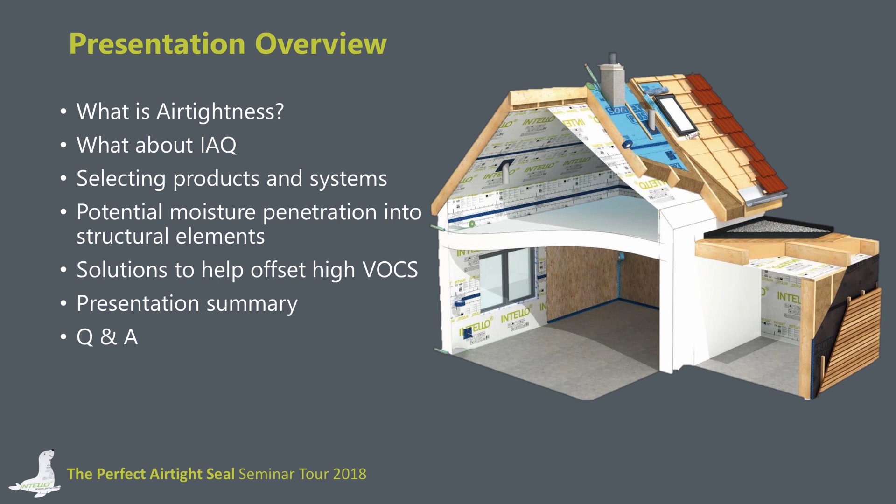My next presentation is stepping back and looking at airtightness more generically, speaking about indoor air quality in buildings and improving health in buildings. Because airtightness is a very emotive term, there's a lot of confusion about what it's really trying to achieve. I'll recap briefly on what airtightness is and its relationship with indoor air quality, looking at systems and materials used, potential sources of moisture in buildings and structural materials, and solutions to offset volatile organic compounds or toxins getting into the building, then give a brief synopsis and recap.

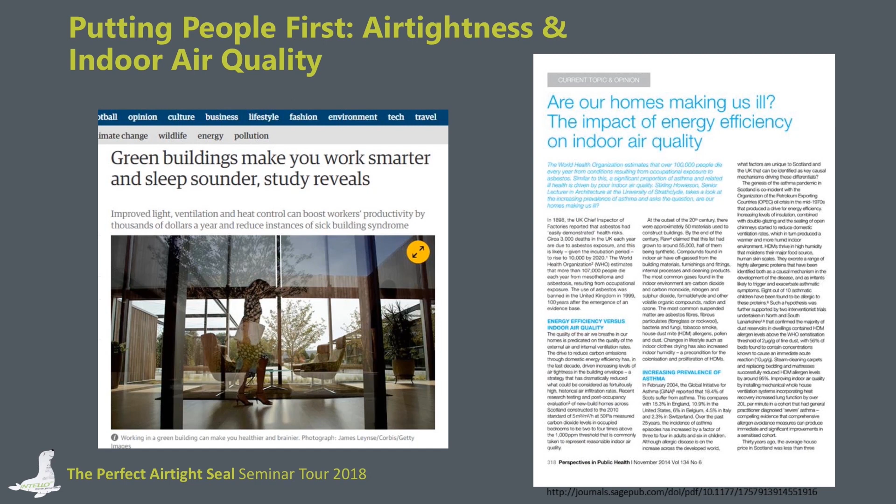There's a lot of confusion about healthy building or low energy buildings. This article from The Guardian says green buildings make you work smarter and sleep sounder, a study shows. But for every article like this, there's one like this: Are our homes making us ill? The impact of energy efficiency on indoor air quality. So there's a lot of conflict in terms of what we're trying to achieve. At the end of the day, buildings are for living in and for health and well-being - they're not energy incubators.

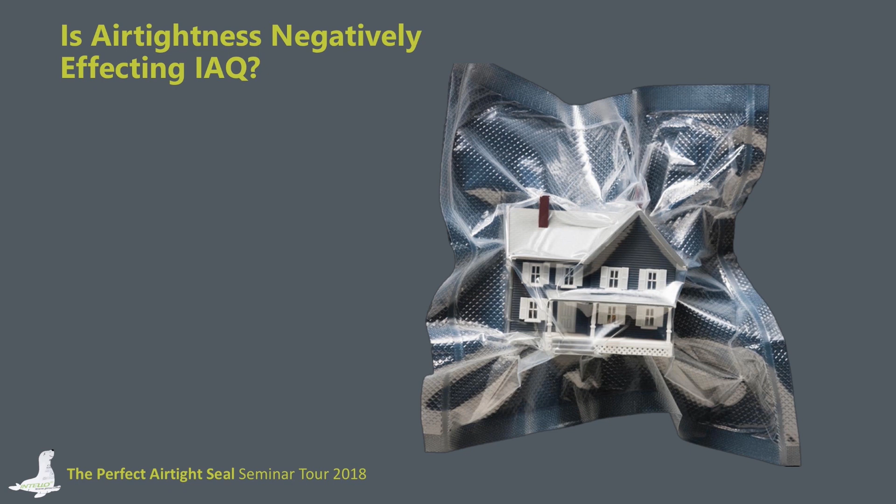There's a lot of confusion about energy efficiency and energy improvements in buildings, and that may be down to a lack of experience and also bad experiences to some degree. Airtightness as a term is very much about reducing gaps which shouldn't be there in the first place - it's not about hermetically sealing a building, locking the windows and making sure you can't get any air in. I recall one builder at our training centre with no experience with airtightness, and we were explaining to him what airtightness was.

He ran a blower door test in our training unit, and he was looking at us scratching his head, then he went over to the door and opened it and said, 'Now look, now your airtightness is gone. What's the point?' So airtightness is a confusing term.

I go back to my example earlier on. When I put over the curtains in my house, the curtains are still moving in front of the windows due to leaks. But when I live in an airtight house, when you pull over your curtains, they're not dancing in front of the windows because they're good windows, well installed with appropriate materials. And what about leaky buildings? Aren't they healthy? Aren't leaky buildings that allow the wind to blow through our plug sockets, our skirting boards and places like that very healthy living spaces?

Well, in fact, mould growth has been a long-term issue - it's not a recent phenomenon. In the UK and Ireland, and all over the world, we're regularly breathing VOCs from mould or some level of mould. Mould is omnipresent, but it's a question of concentration, the amount we have, and its intensity. Some people differ in their reaction to it as well.

We see this building here, for example. This is a building that's extremely leaky and had an energy retrofit, and a lot of work was done. It's a cavity wall where the cavity walls were pumped with insulation, and the insulation in the attic was upgraded. Following this, a neighbour of mine asked, 'Niall, could you have a look at my house? I'm having these mould issues.'

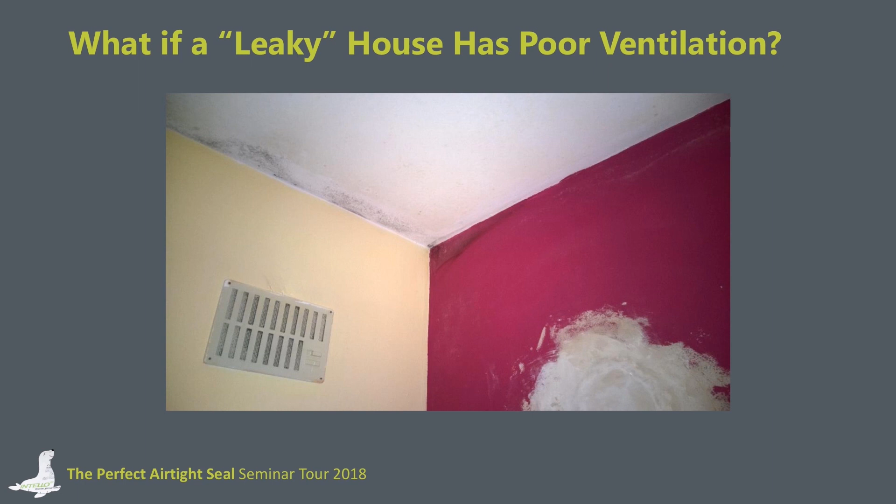Where there once was no thermal bridges, it was inefficient. Now, because insulation was sporadically installed, leading to differential temperatures, we had these thermal bridges. The local builder's solution was to core a second permanent vent in every room, thinking this was a ventilation issue, but of course it wasn't.

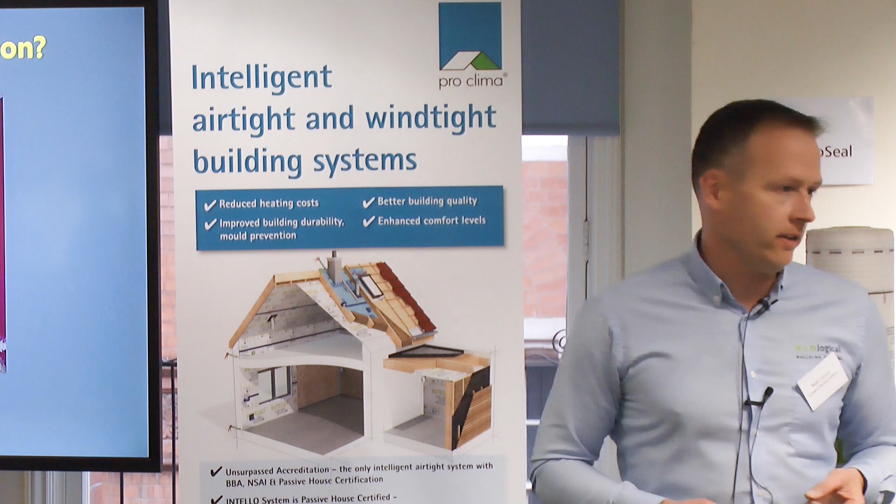So are leaky buildings healthy buildings? I would say all buildings need to really look at our ventilation strategies, not just airtight buildings, but a hole in the wall and a leak through a plug socket isn't a robust ventilation strategy. Air infiltration is uncontrolled, or drafts. Ventilation is designed and intended. So the key is to build tight and ventilate right, get the balance right, to look at both.

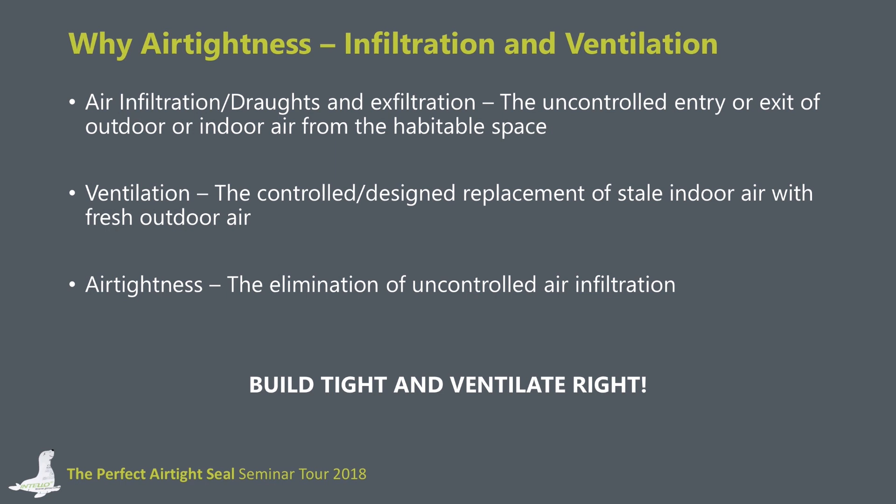It's about building more air tightly, but ventilating well. For ventilation to work, we need good air tightness. But of course, for air tightness to work, we need good ventilation.

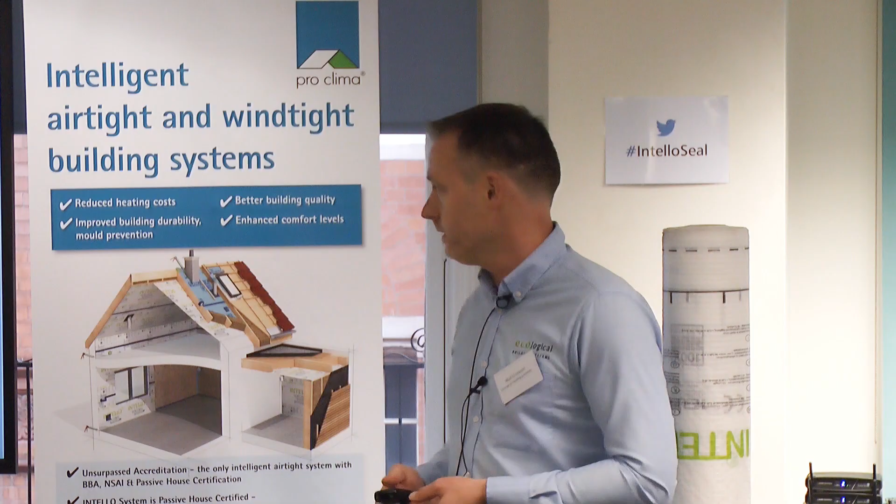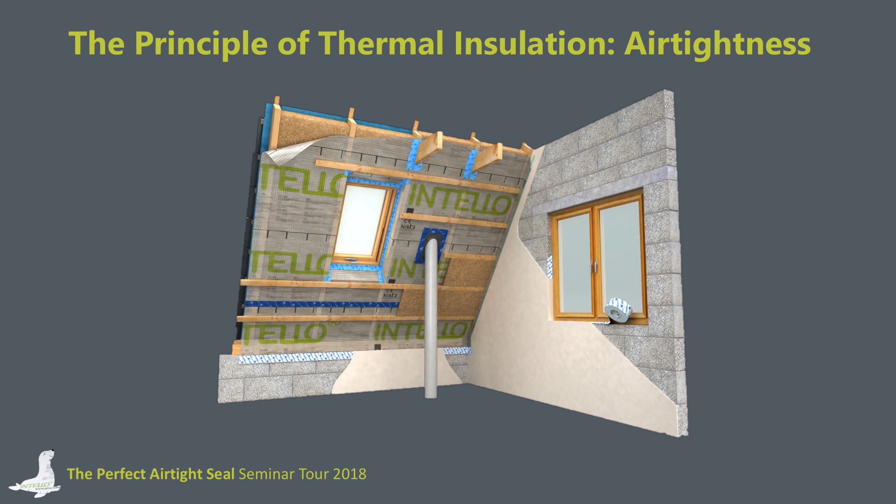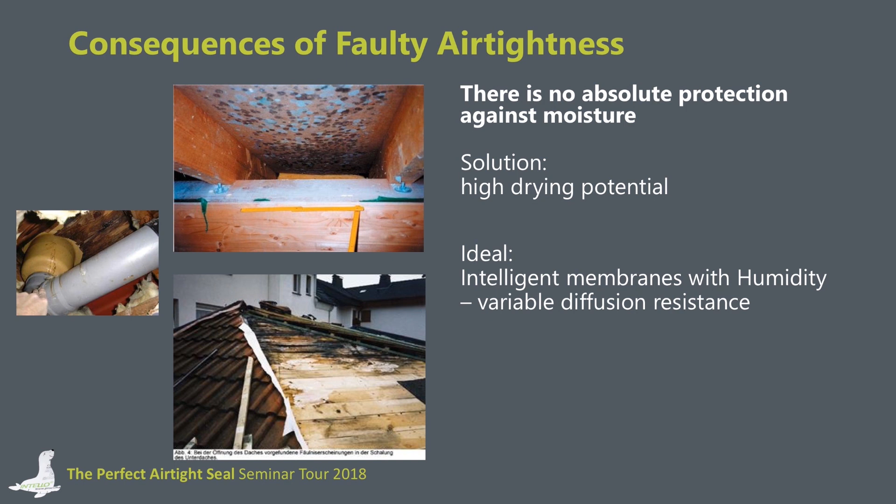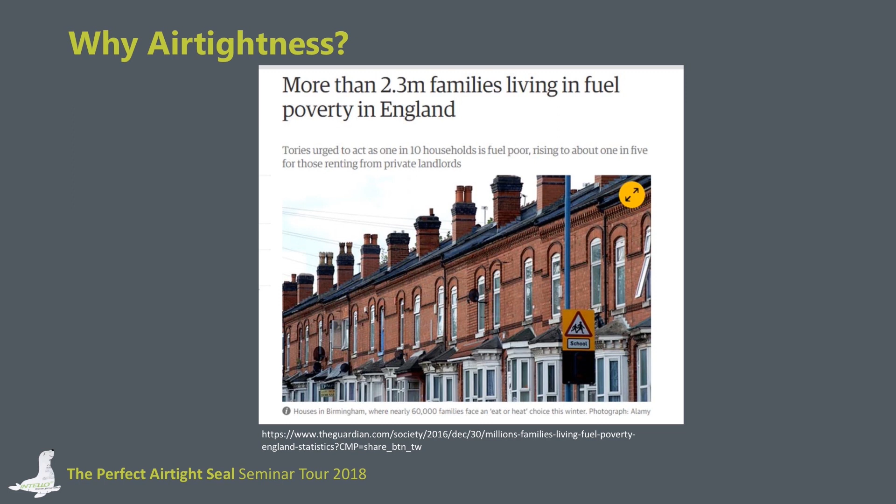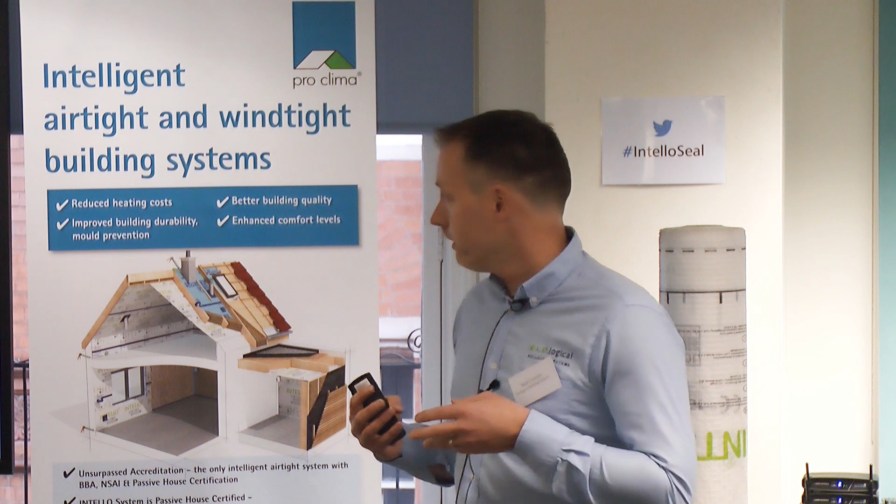In terms of air tightness, energy is key, and to help offset fuel poverty against the people who need to conserve energy the most, air tightness is going to have a key role to play, because in the UK and in Ireland we don't have extremes in temperature. We have a relatively mild climate, but we do have a very windy and exposed climate, especially on the west coast and the northwest, and the influence of the wind is going to have a big influence on our energy bills.

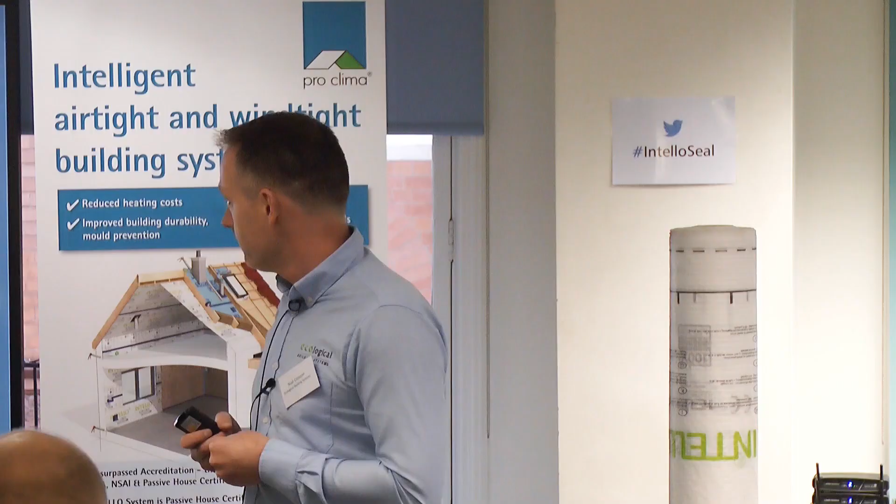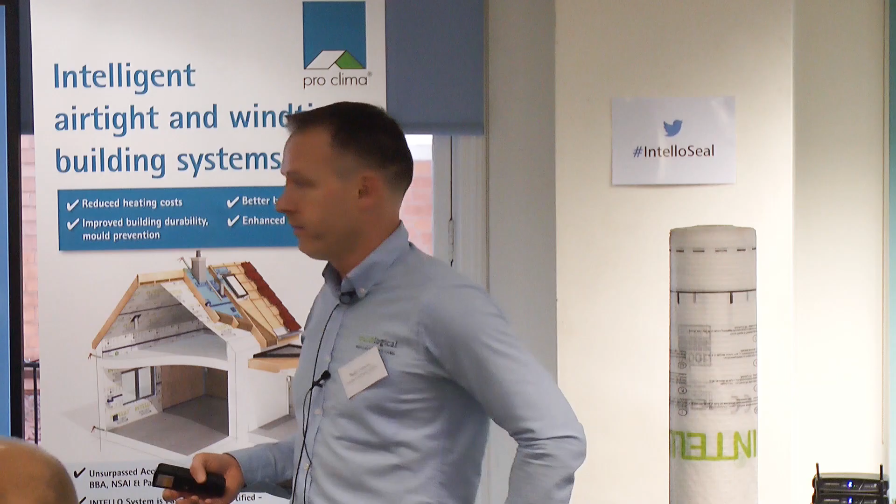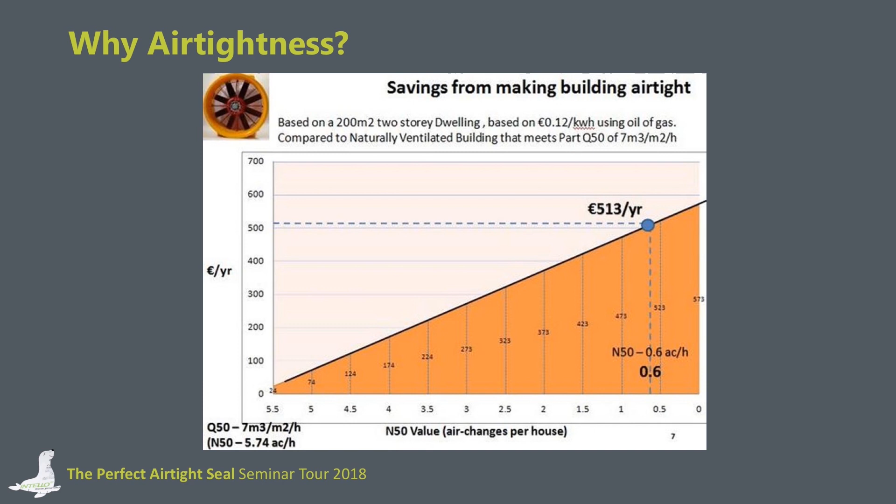This building has been run through the Passive House Planning Package just to see how much the primary energy demand was reduced. What it shows is by going from the building regulations we have in the south of Ireland, which is 7, down to passive house levels of air tightness, the resulting reduction in primary energy demand led to a cost in space heating saving of over €500 per year.

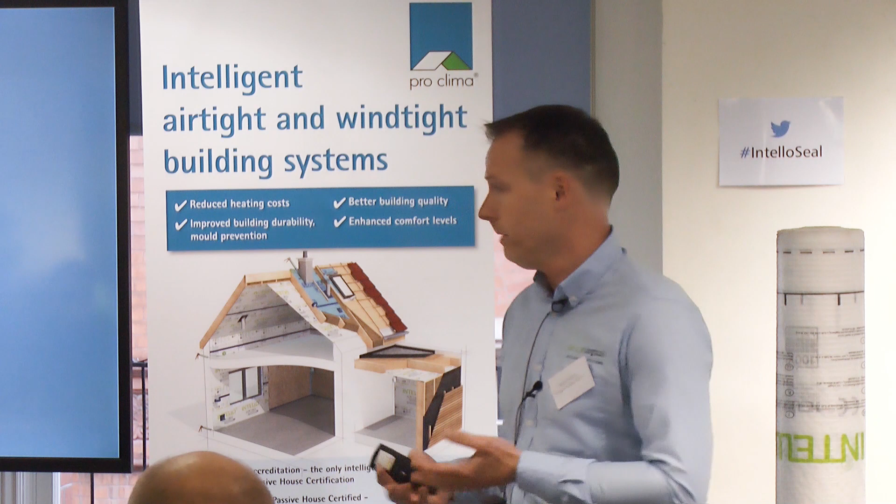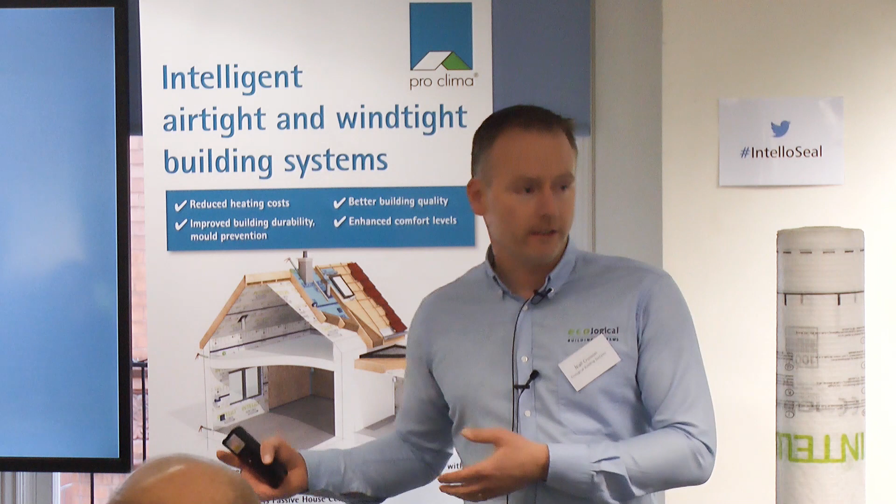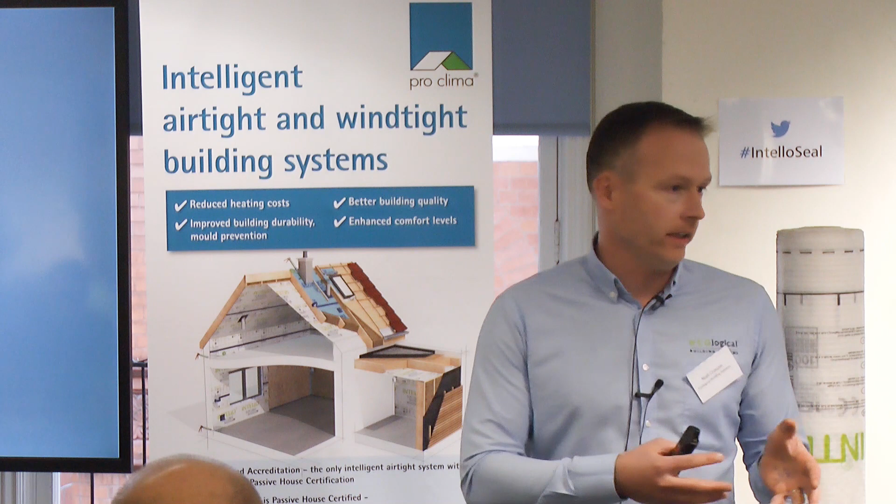So if you take the materials required for air tightness on an average, say 3-bed semi-detached house, which seldom costs any more than €1,000, the payback in materials is quite fast. Now that's excluding the labour, but air tightness doesn't have moving parts, or it shouldn't. It isn't about increasing wall thickness, it's not about adding complexity. It's something you do once, and you don't have to go back and change, hopefully. So it's a one-off investment, and it's something you only get one chance to do, so it's very much worth doing.

And we breathe a lot of air in buildings, and air tightness has a key role to play in improving air quality. We spend up to 90% of our time in buildings, and we breathe in over 3,000 gallons of air per day, per person.

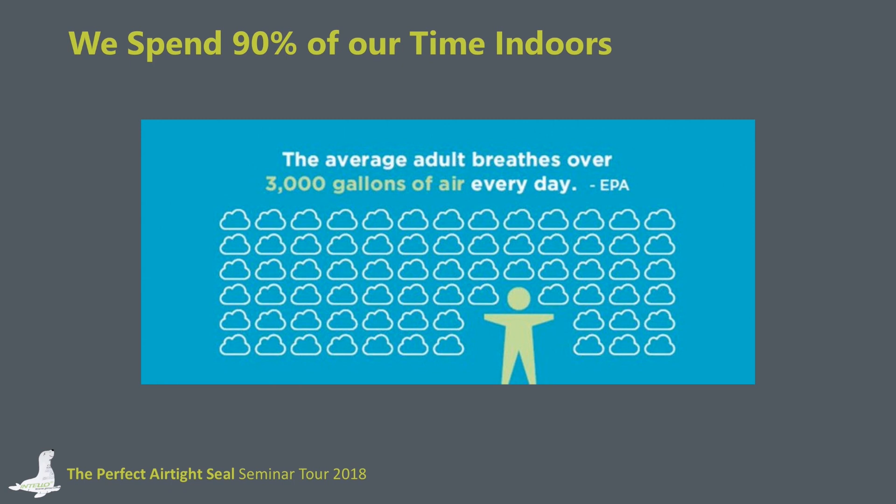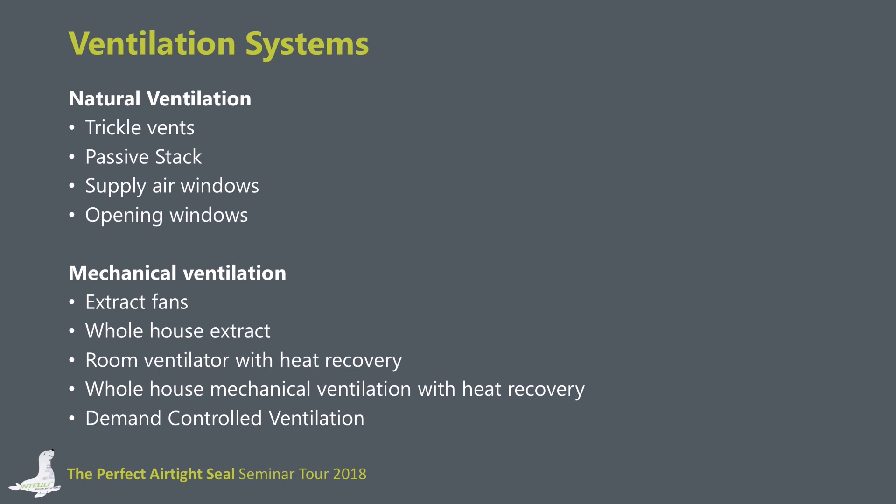So ventilation is key, and there are many ways and means of ventilating buildings that I've already gone through in the previous presentation. But if we are using innovative technology, it's important, for example with mechanical ventilation like heat recovery or other systems, that filters are maintained.

And this is a major issue in industry, of course. Now, I think we're very familiar with this now. Many issues arise where systems are not being maintained adequately, and homeowners aren't getting adequate education on replacement of filters.

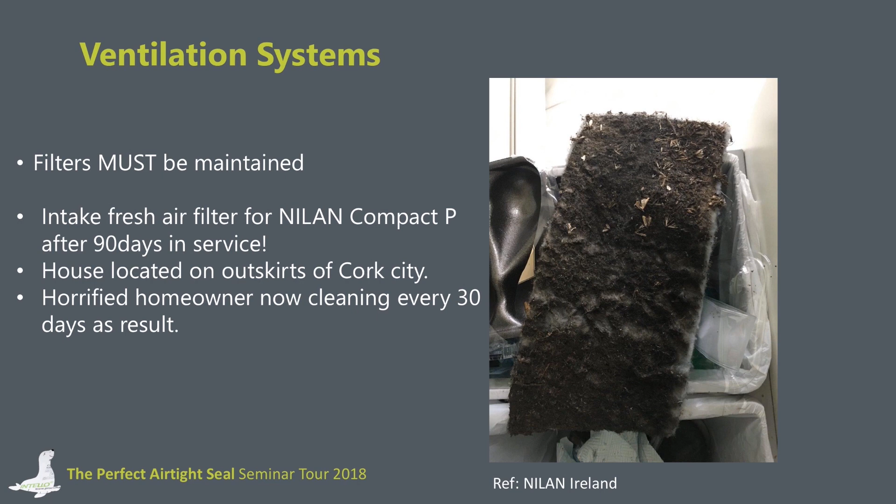This is an image from a unit where after 90 days of service, this was the inlet for the filter, and we see the amount of dust, debris, tar and carbon that was collected in it. Not a highly populated area, but the homeowner now changes the filter every 30 days instead of every 90, after seeing that. So maintaining and changing filters is very important.

So in terms of ventilation systems and improving air quality, what about the materials we're bringing into buildings? Ventilation is important, but what about source control and looking at what we bring into buildings? At the beginning of the 20th century, we needed about 50 materials to build a building. How many materials do you think you need now to build a modern building? 55,000 materials are brought into and used in buildings now.

So as we're bringing in more and more materials to buildings, these materials will potentially be giving off more VOCs or gases, be it pictures on walls, TVs, printers, mattresses, carpets, fire retardants. There are countless materials. Compounds found in indoor air have often off-gassed from building materials like furnishings.

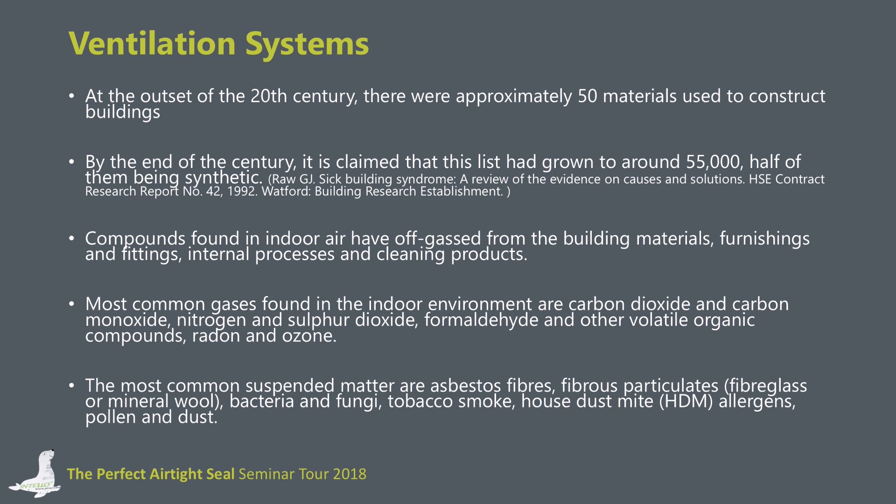We've mentioned many of them already - cleaning products. The most common gases found are carbon dioxide, carbon monoxide, nitrogen, sulfur dioxide, formaldehydes from floors, paints, carpets, VOCs, radon, ozone. And the most common suspended matter are asbestos, fibrous particulates from materials, bacteria, fungi, tobacco and so on. So there are many potential toxins and allergens within buildings.

If we look at research into asthma and allergies, Ireland has the highest rate of asthma in Europe, and the UK is pretty close as well. 1 in 11 children and 1 in 12 adults in the UK have asthma. One of my daughters has asthma. And 3 people die every day on average from asthma. In 2014, over 1,000 people died from asthma. Not only is it very sad and a tragedy for people, but also a huge burden on the NHS.

Air quality has a big impact indoors. It's one of the factors. We spend 90% of our time in buildings, and this is going to affect our respiratory system.

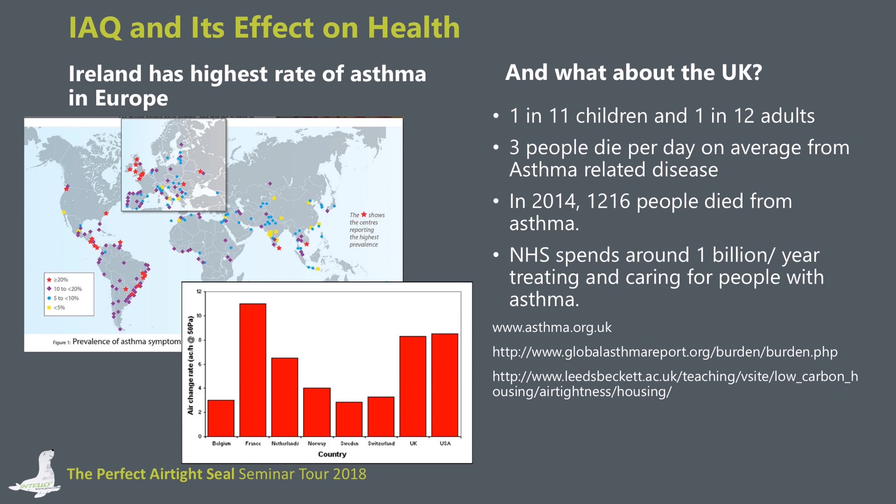We see here an air leakage data report from Leeds Beckett University, which carried out a statistical analysis of airtightness testing on over 200 buildings. In the early 1900s, 1900 to 1910, the airtightness test result was relatively good - coming in at 10.5 for the buildings analysed. Then as we went through the decades, the air leakage rate went way up in the 1930s, 1940s, 1950s, and they only began to get back to equivalent levels in the 80s and 90s.

Why is that? Well, older buildings had monolithic walls, brick and stone with wet plaster, which was pretty airtight. So your leakage was coming through maybe the suspended floor, but put a carpet down and that helped improve that. The windows and doors had shutters maybe and weight boxes, which allowed air infiltration, but the actual physical structure was inherently quite airtight. As time moved on, we moved away from the wet trades, put on block work with plasterboard and drywall, and without the wet plaster on the block, the buildings became a lot leakier as a result.

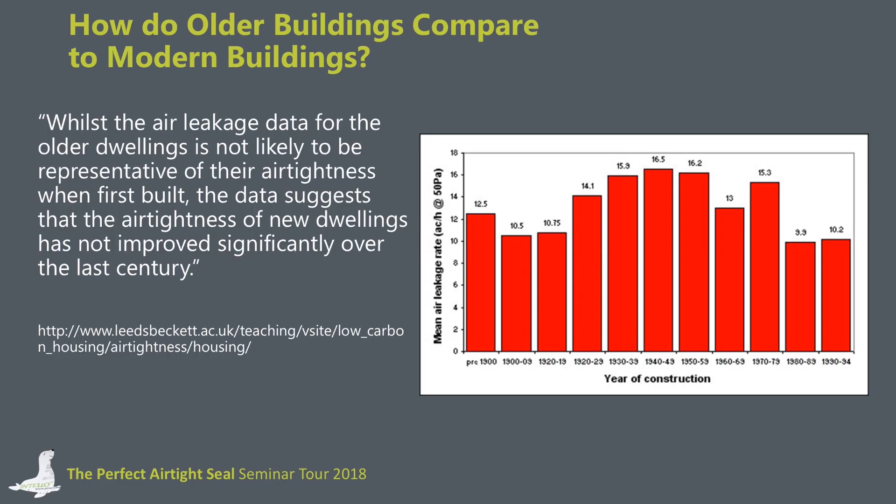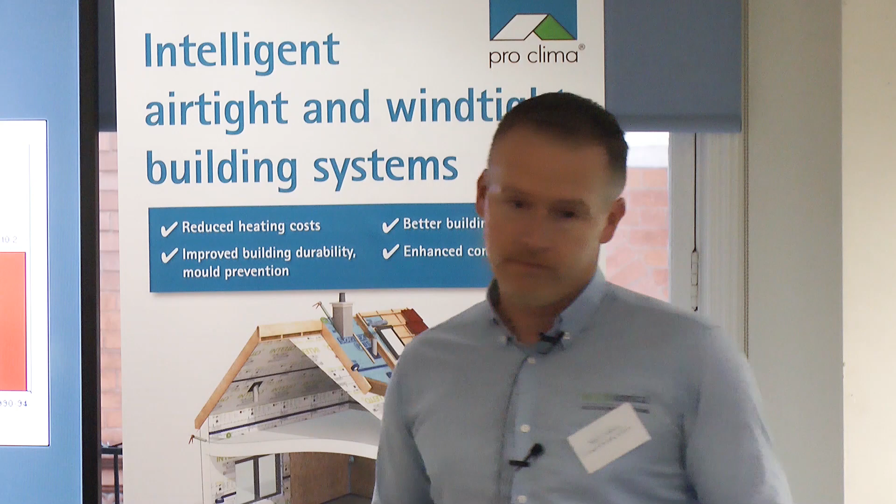So airtightness isn't relatively new. The difference is, in the modern day, we now have a scientific measure for how leaky our buildings are, and we're measuring it. But we've always been trying to stop drafts getting into buildings.

And the influence of improving air quality and ventilation in buildings is really incredible and can have a big influence on the budget for health spending and general well-being.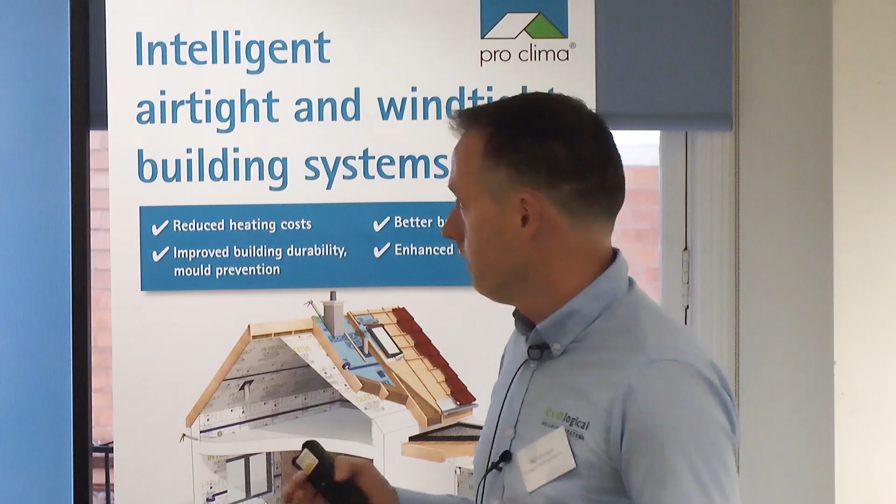This report from the NHS in Wales carried out a cross-analysis of hospital admissions to an ER room in a specific region, and anonymously cross-analysed this with houses which were refurbished with energy upgrades to ventilation. It looked at the percentage reduction in admissions to ER, and recorded a 39% decrease in ER admissions for cardio and respiratory issues post-upgrade. And where ventilation was improved, it was a 57% reduction in respiratory-related admissions, just by improving ventilation strategies.

So we see the huge impact. This report was published this year. You can see it's unquestionable, the benefit in improving ventilation strategy and energy upgrades in buildings.

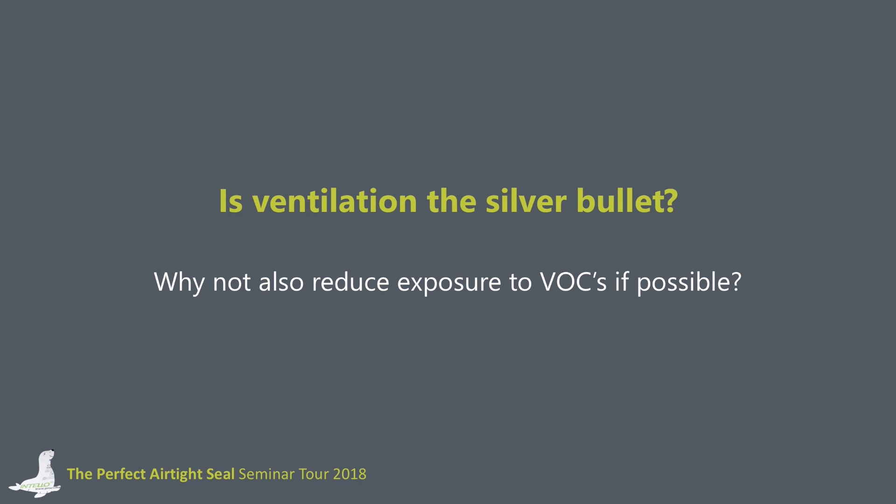So is ventilation the silver bullet? No, as I've often said, ventilation is important, but also why not look at what we're bringing into buildings as well? Why not reduce the source of toxins as well? We can't eliminate them completely in the real world, but we can help reduce them.

So we can look at the materials we're specifying. Do they have approvals such as Nature Plus approval? In Germany, there's the Blue Angel standard for the Asthma and Allergy Association in Germany. Or there's the Sentinel House Institute in Germany, which is the equivalent to the Passive House Institute. It's a private organisation which measures air quality and total volatile organic compounds in buildings when they're completed. You get a certificate to be a Sentinel House, but you have to work within stringent standards for VOCs.

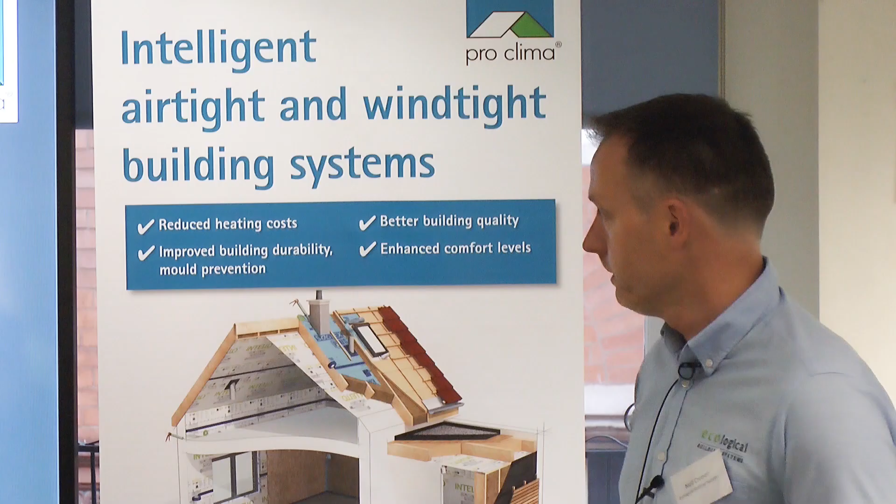In terms of materials like the ProClima system, for example, this A+ label is from France for off-gassing and toxins, so it doesn't contain VOCs or harmful emissions. As a rule, if you have to wear a spacesuit and have an oxygen supply tank to install a product, I tend to get raised questions about its influence on health. And Sentinel House has certified ProClima products as well.

The Living Building Challenge is not UK based, it's an international standard from America, but it is really at the peak of accreditation for building products declaring their ingredients. So the Living Building Challenge has a red list of materials where you are not allowed to bring specific materials into the building. They include creosote, not surprisingly, and bromine, and PVC.

Even PVC windows are not allowed to be used in a living building, or PVC on electrical cables, even. It's to that level. And flooring as well. It has extremely onerous levels in the red list. So if you look at the Living Building Challenge, you'll get a red list.

And you also have a declare label scheme where manufacturers will have the opportunity to declare ingredients used in components, to declare they don't contain anything from the red list. So we see ProClima Tescon Vana, and Intello as well, has a declare label from the Living Building Challenge. This is, at the moment, really at the cutting edge in terms of sustainability.

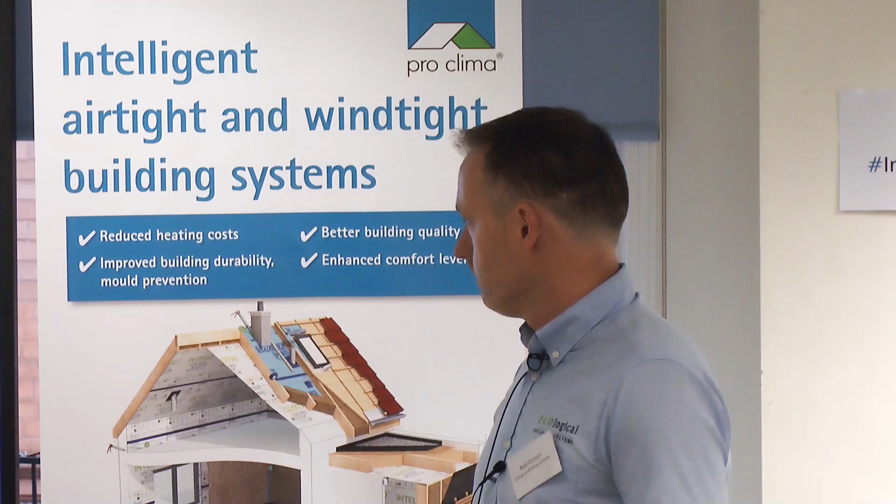There's also materials which can help reduce VOCs in buildings through what's called a photocatalytic action. This paint, for example, is called Air Fresh paint, which is a lime-based paint, activated when the sun hits it, and it helps break down formaldehydes, toxins, nicotine, and smells as well, which has been medically tested. We can see over time how it breaks down formaldehyde.

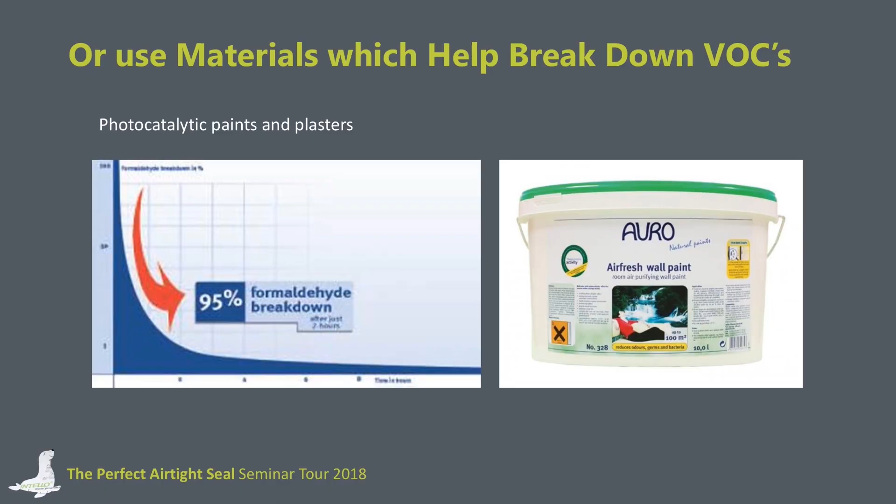There are various materials which have this property. I've used this product in one of the bedrooms for my children. It just helps, it's another way of improving indoor air quality, along with ventilation, of course.

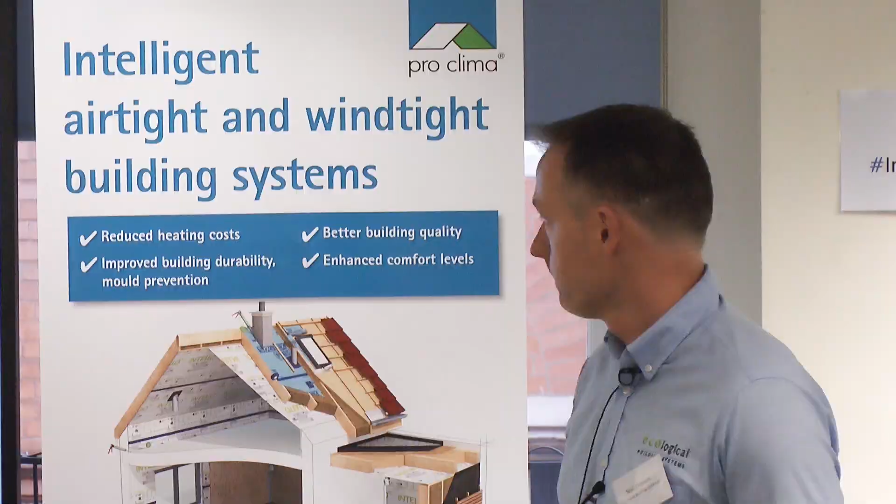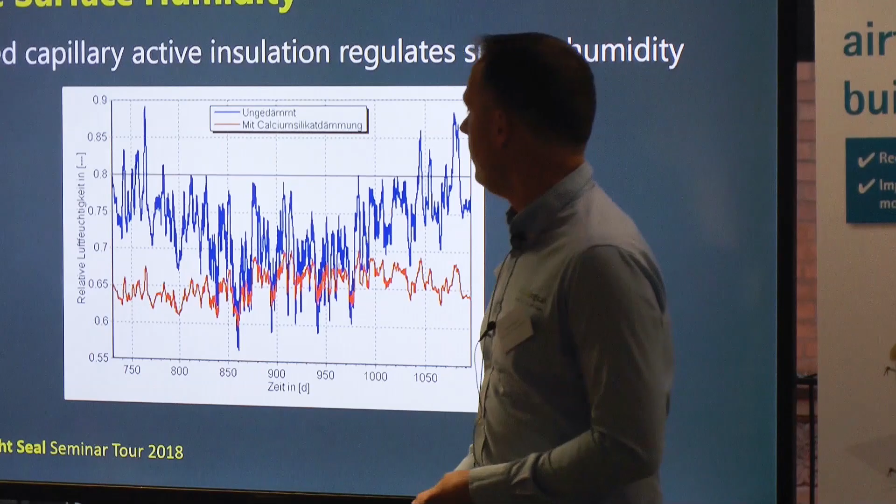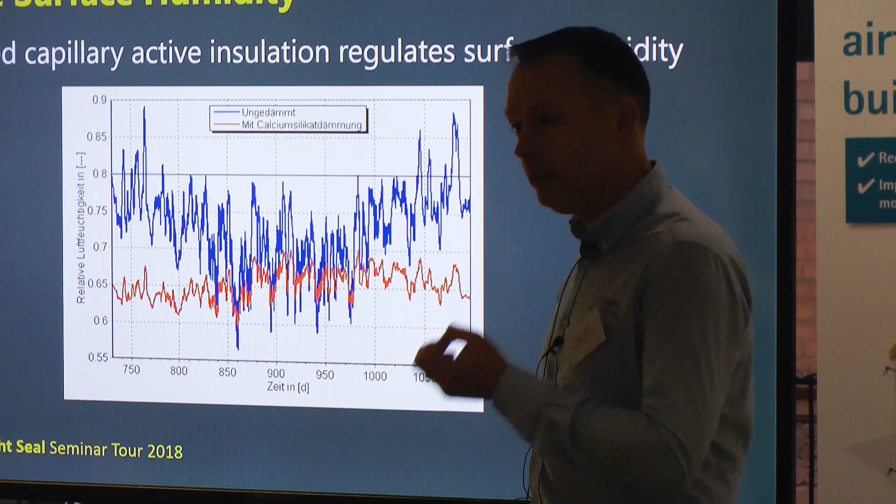What we see here is if the wall is insulated with 50 millimeters of Calsitherm, a calcium silicate board. Calcium silicate is a lime-based insulation with extremely high humidity regulating properties. And we see now the surface humidity is staying at around 65% by insulating the surface, so materials can help further reduce the risk of mold on surfaces.

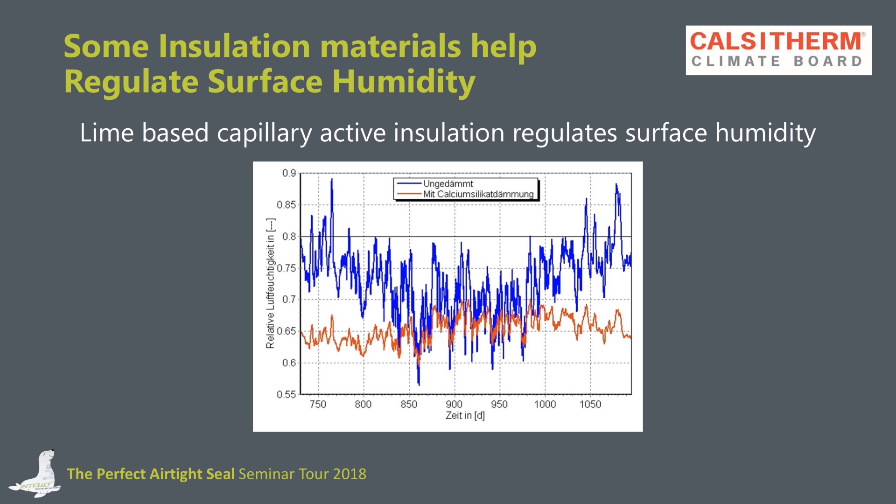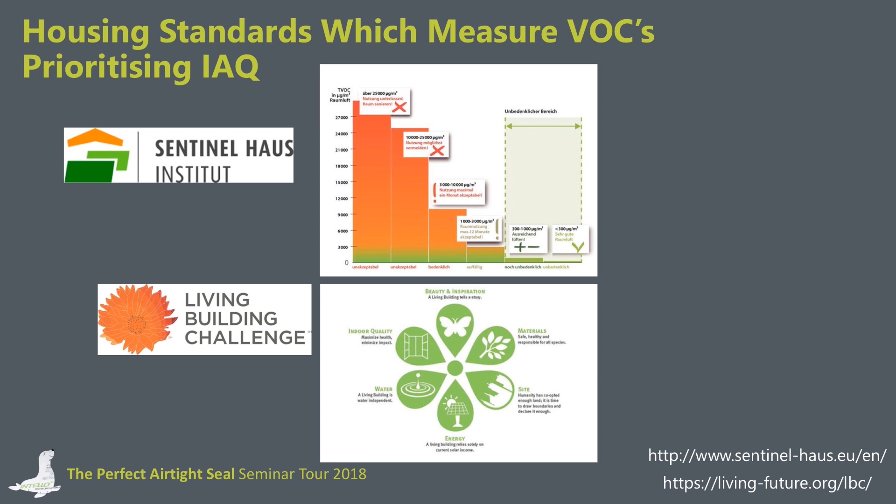In terms of housing standards, our approach in Ireland, for your information, we have the Home Performance Index, which was launched by the Irish Green Building Council, which I work with as well. We launched that last year, and we see it now driving developers to move beyond just an energy performance certificate, or energy rating as we call it in Ireland.

So energy rating or energy performance certification is very narrow. The Home Performance Index looks at the vicinity of the building to amenities, to public transport, well-being, indoor air quality, and a lot of other factors.

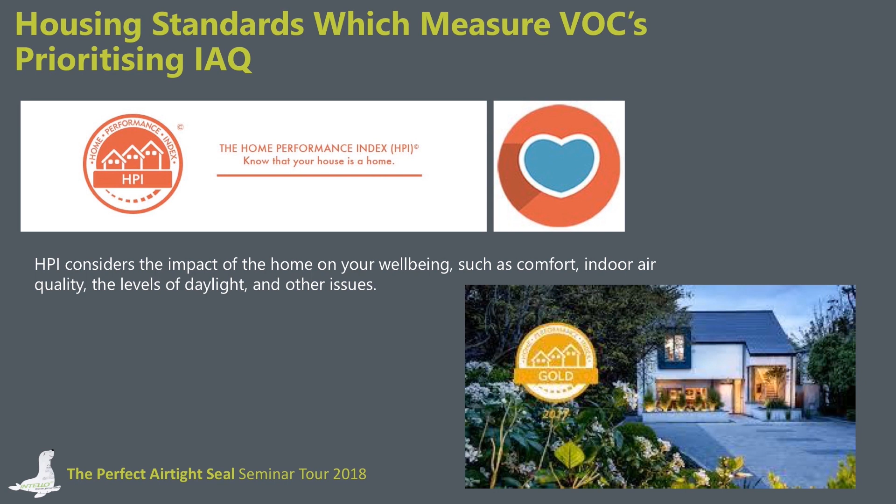This is a certified passive house in Cork, which achieved Home Performance Index Gold, the highest possible standard with the Home Performance Index. It's by an architect called John Moorhead, a very interesting project.

Finally, in terms of housing standards and comfort, the Passive House standard is actually a comfort standard. At the core, it's not necessarily an energy standard, it's really a comfort standard, which refers to ISO 7730. So our Passive House, for all the promotion of it about energy performance and so on, which is very good, it's very much about comfort and maintaining comfort.

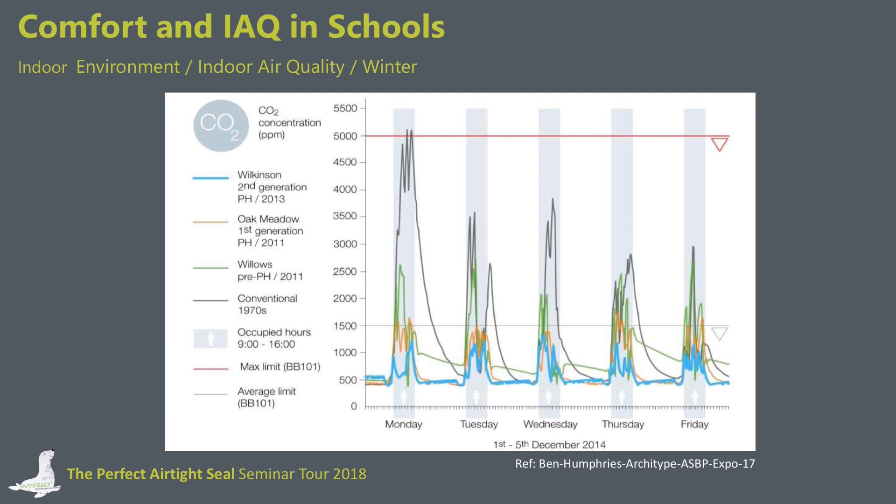Finally, in terms of air quality, there are tools now to help us monitor air quality in our homes, and there are more and more of these available, which can connect to our phones and tell you about the CO2 levels in your home, VOCs, humidity, and so on.

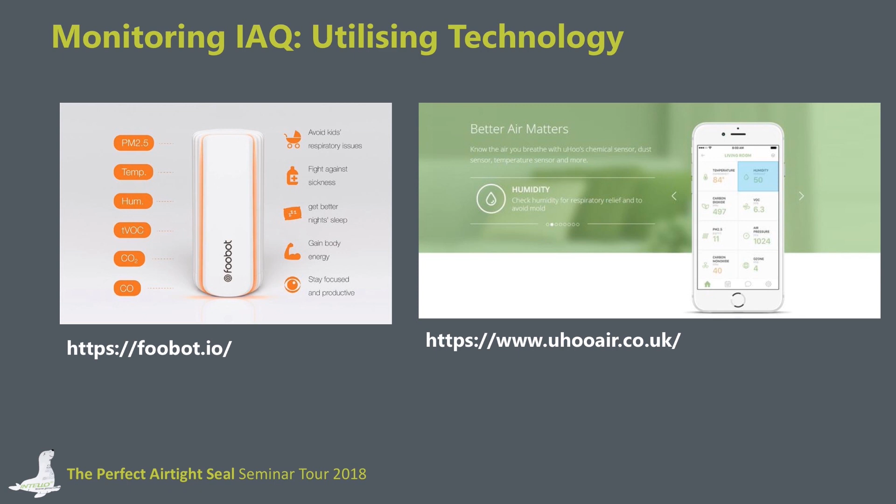To summarise, airtightness will determine the effectiveness of the insulation. It must be planned. A lack of foresight, as Alex very eloquently showed earlier, will lead to huge potential cost overruns. It must be attained with materials fit for purpose. Planning and coordination is important, and meticulous workmanship is crucial.

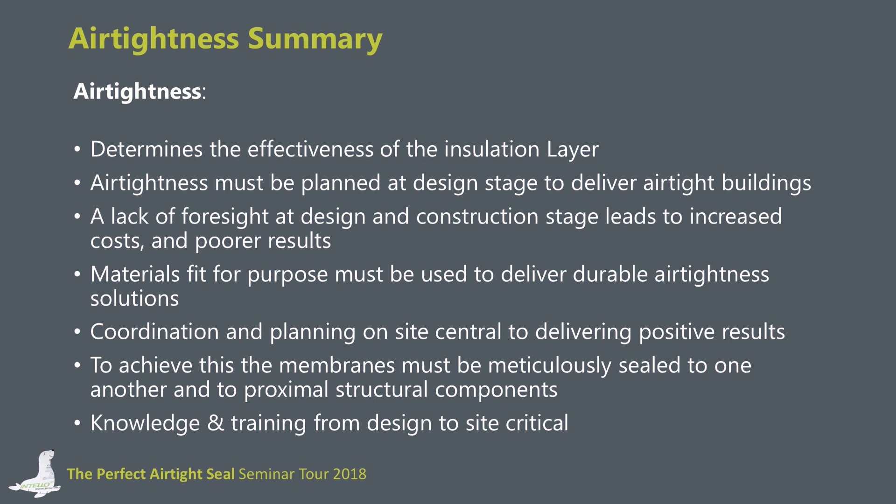In terms of air quality, leaky, well-insulated buildings lead to poorer indoor air quality. So a leaky building is not necessarily a healthy building. It's about building tight and ventilating right. Whether a building is airtight or not, ventilation is essential, having a robust ventilation strategy.

As building regulations improve and Part L improves insulation standards, that must be done in step with improvements in ventilation standards. In retrofit, that must be particularly handled with care and must be viewed looking at retrofits as a whole, as a system, rather than just taking airtightness and insulation as with any building, but in particular in retrofits.

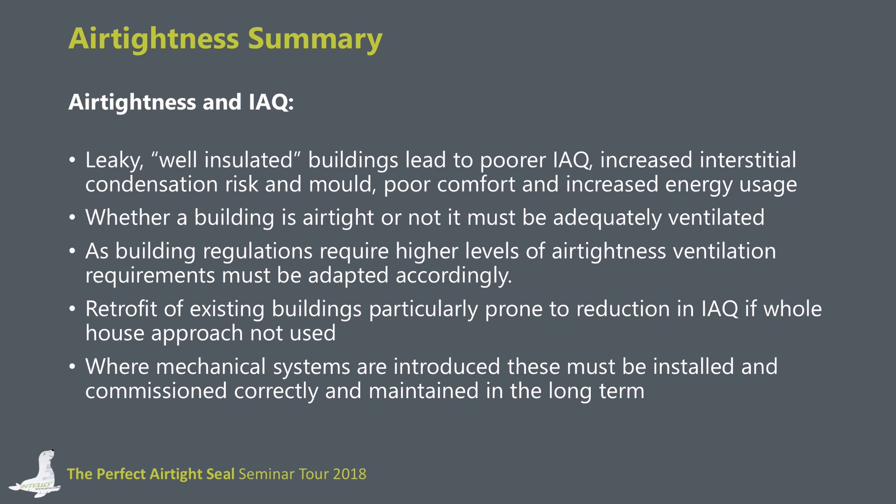Where mechanical systems are introduced, they work extremely well, but commissioning is crucial, that it's done well, and also that it's maintained by the homeowners, and that they understand they have to change filters and maintain the system. For a healthy population, we must start with healthy homes.

In terms of further reading, the UK Centre for Moisture in Buildings, which we're involved with on a number of advisory boards, have published this document, Health and Moisture in Buildings. It's freely available and it's an excellent document I'd highly recommend. And the UK Green Building Council have also published this document, Health and Wellbeing in Homes. There's other information there which is available. Thank you.